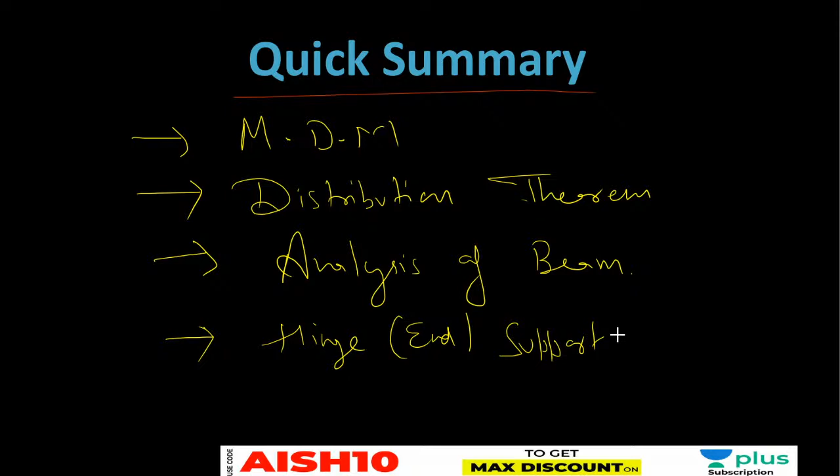Okay, whenever my far end is hinge, last support is hinge, so you can directly consider that support as a hinge support. Okay, तो उससे क्या होता है आपका, आपने कल देखा, टाइम बचता है आपका. इज इट क्लियर? ठीक है. So hinge and hinge, we have analyzed that with two ways. One, considering it fixed, considering it hinge. Okay, so both the approaches we have seen yesterday. I hope समझ में आया होगा आपको. कोई डाउट हो तो पूछ लीजिएगा.

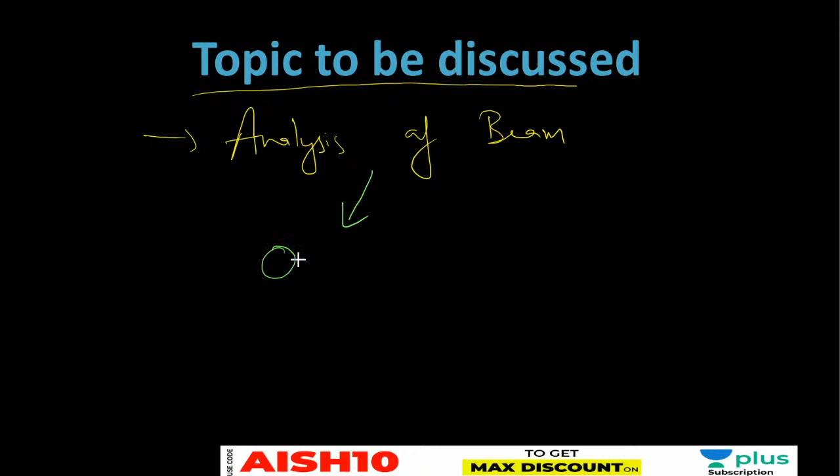ठीक है, चलो. So today we have to see analysis of beam only. Analysis of beam, और आज बीम ही एनालाइज करेंगे. और इसमें बेसिकली I am going to take care of overhang portion and support settlement. ओके, ये दोनों टारगेट है मेरे आज के, है ना. सपोर्ट सेटलमेंट की बात करेंगे और ओवरहैंग पोर्शन की बात करेंगे. ठीक है, चलिए स्टार्ट करते हैं.

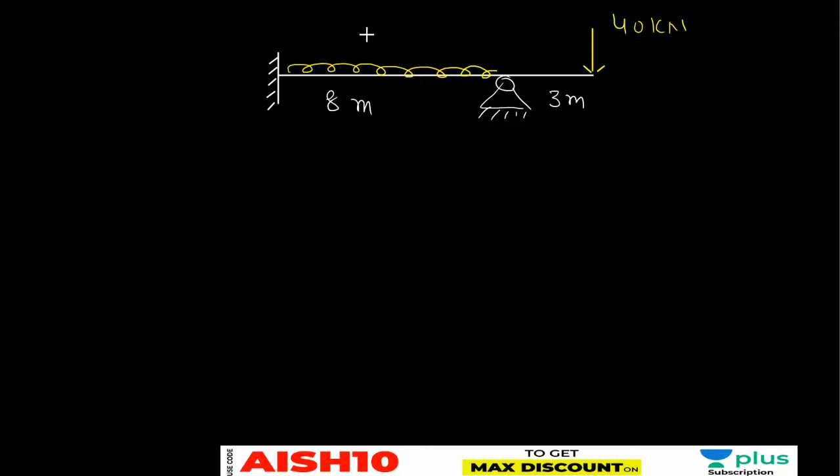Okay. EI is constant, EI is constant, and give me the end moments or draw the bending moment diagram. Okay, EI is constant here. And give me the end moment. I'm giving you 2 minutes time. First of all, give me the distribution factor, fixed end moment. Okay, then we will be proceeding.

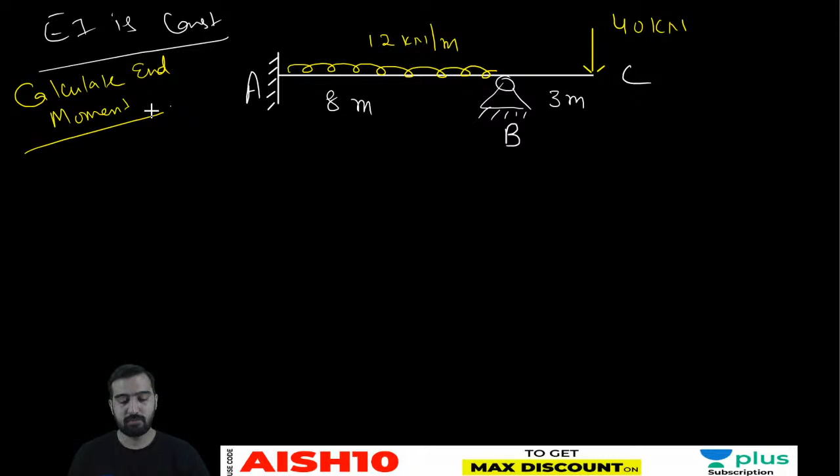Go ahead. So what is fixed end moment?

Okay Piyush, correct.

Is it clear? So MFBC, or you can say final moment BC, is same, because there are no corrections for theta, delta. So MFBC is nothing but MBC. Is it clear?

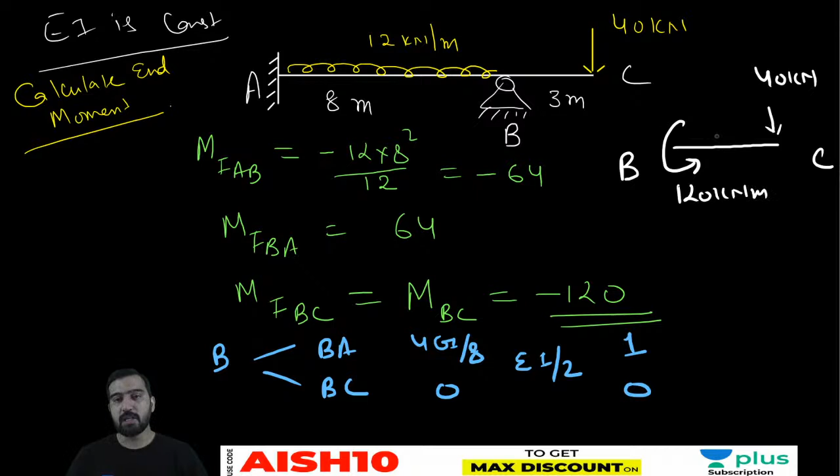So if we have to maintain it in moment equilibrium, then I have to provide 120 kilonewton meter in anti-clockwise direction. Then only this segment will remain in equilibrium. Is it okay Astha? Yes, it is minus 120.

Yes, the distribution factor is also known to you guys. Okay, so now what is next?

Okay, so now see joint, member, and distribution factor. So here joints are A, B, and C. Members are AB, BA, BC, and CB. Distribution factor is 1, 0.

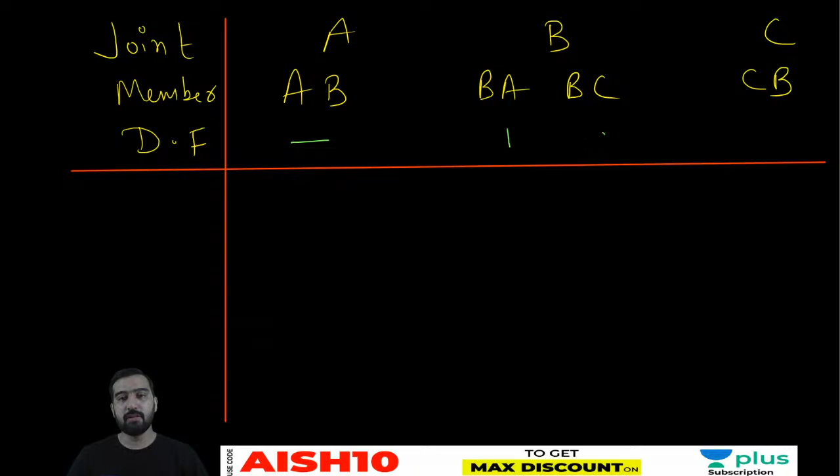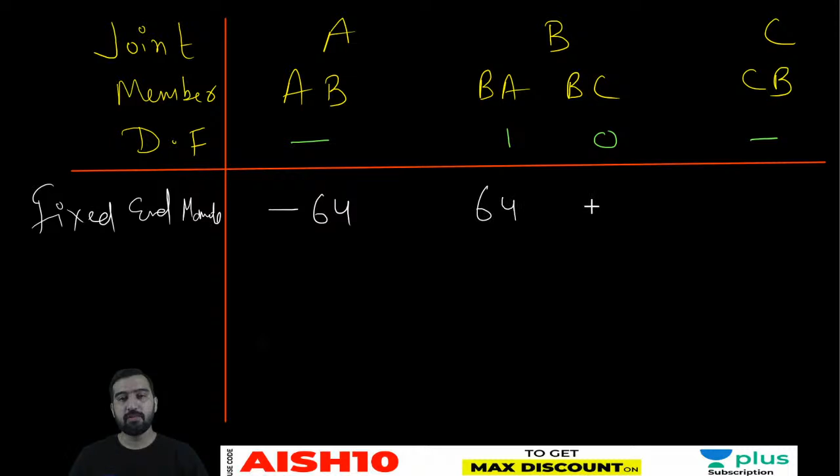Okay, it's like this. And the very first step is to write the fixed end moments. So fixed end moments, they are minus 64, plus 64, minus 120, 0.

After that we have to do the distribution here. So on distributing it, distribution will be there at this B support. So here it is clockwise and it is anti-clockwise. It is 120 and it is 64.

So how much is the unbalancing? 56, I guess. So that 56 anti-clockwise. So you have to provide plus 56 from your own side, and that plus 56 is to be applied.

Then that is to be distributed in the ratio of 1:0. Means the entire 56 will come here, and out of 56, 0 will come here because the distribution factor for overhang portion BC is equal to 0.

And my dear friend, after that we have to look into the carryover factors. So carryover factors, you can see that they are going to be 28, 0.

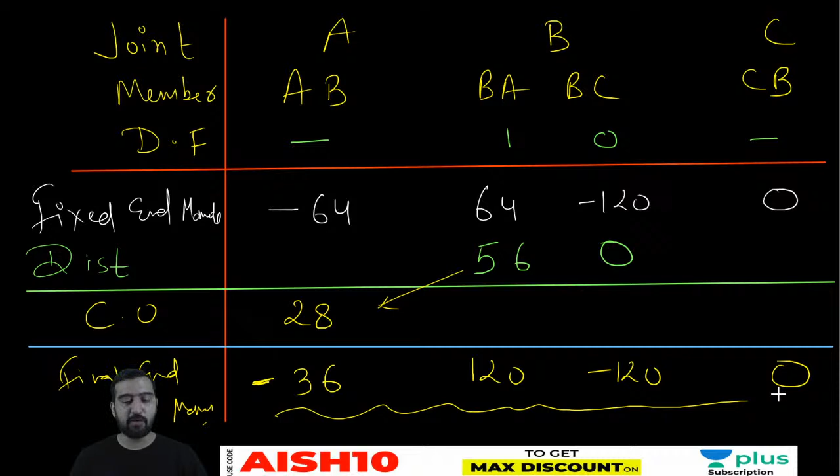Please check it, my dear friends. Yes, Harshit is also getting the same. Okay, so Harshit is also getting the same.

Is it clear to everyone? Please let me know if you guys are having any doubt till here. Is it clear to all my dear friends?

Okay, so I'm not drawing the bending moment diagram exactly. I'm just giving you the tentative shape, not going exact. So this is my base. Okay, so it is A, it is B, it is C.

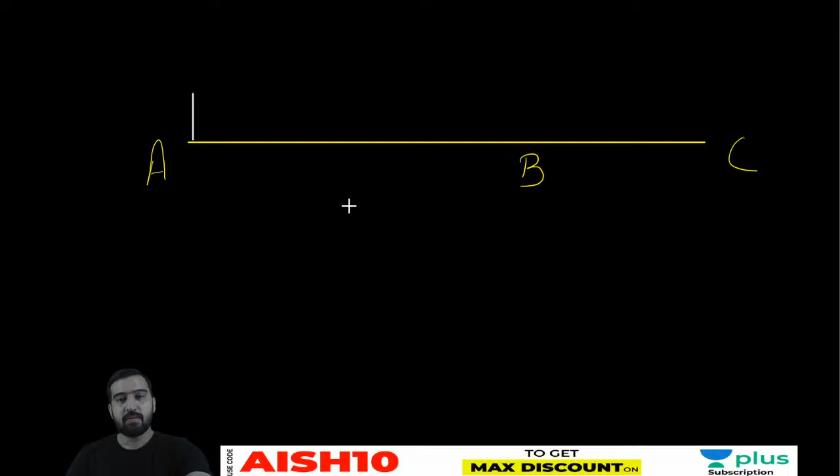So if I am drawing the bending moment here, it is anti-clockwise, negative is on the left side, on top, and it is 120, coming down below. I am only giving you the tentative shape of BMD, not solving exactly.

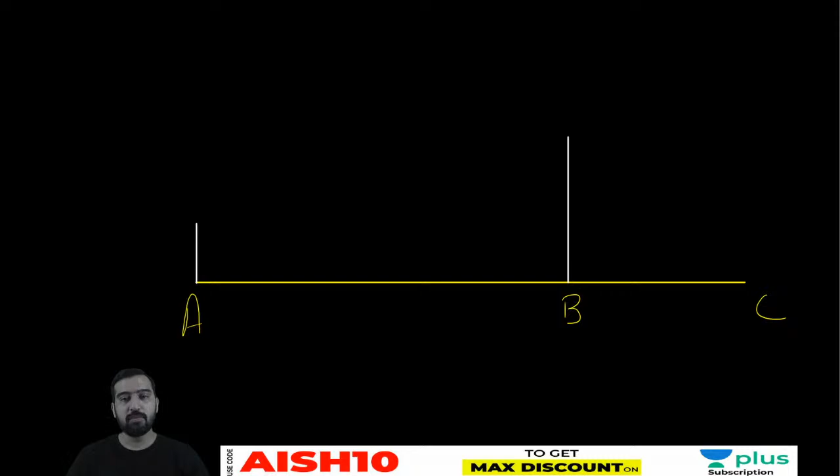Okay, this becomes -36, anti-clockwise so it will come on top as 120. So it is 36, 120. Okay, so the diagram here would be linear.

And this is negative. Okay, now if you are drawing the UDL portion on simply supported beam, WL square by 8, so 12 into 8, 64 by 8... 12, 8, 96. It will go parabolically, and the maximum value here would be...

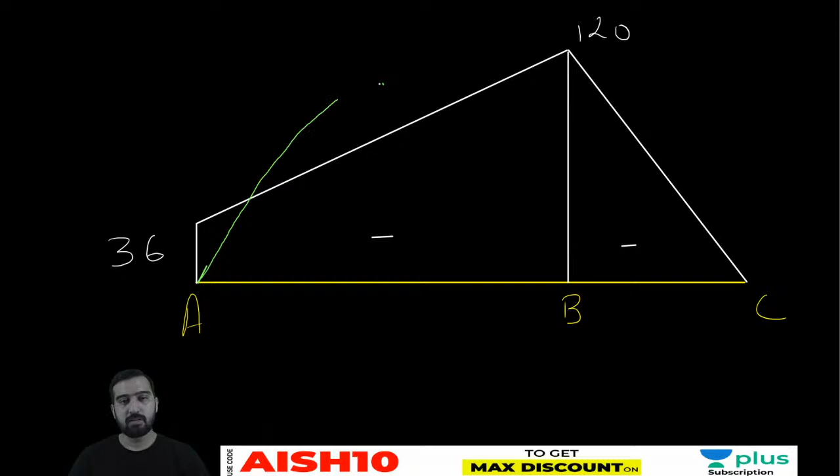negative, positive, negative, negative. So total how many points of contraflexure are there? The total number of contraflexure points are 1 and 2. Okay, so you can say those two points of contraflexure would be somewhere here and here.

So this is in hogging, this is in sagging. From here to here again, the entire thing is hogging. If you want to draw the deflected pattern, then it would be something like this.

Then sagging, then again hogging.

Something like this will come, okay? Is it clear to all my dear friends? And also the slope here, you will be able to find the correct orientation, whether it is anti-clockwise or clockwise. Suppose if I want to know the slope here, so what is slope here?

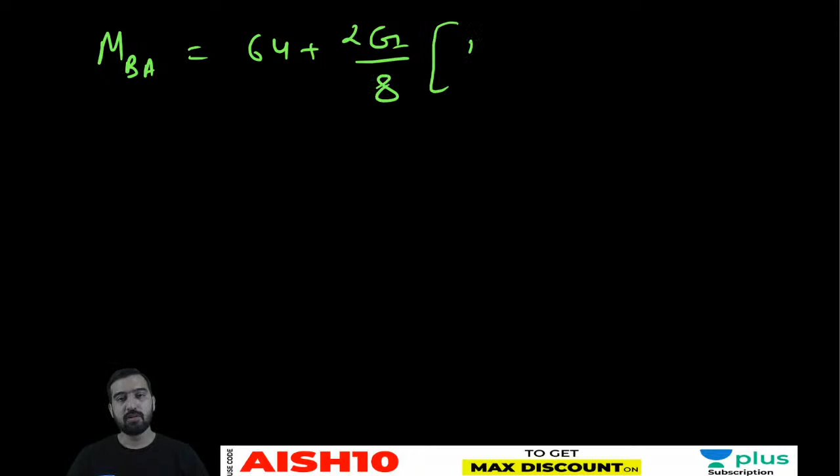That's all. So MBA is 120 minus 64 into 4 by EI by 2.

So it is positive, means theta B is coming out to be positive. It means slope here would be clockwise. So there is some error. It is not the correct shape then.

So now the correct shape would be like this. Yes, it is like this. Okay, this is the deflected pattern of ABC. Is it clear to all my dear friends?

Is it clear to all? Tell me. Okay. Any doubt? Okay, let's do the next one. Next question is...

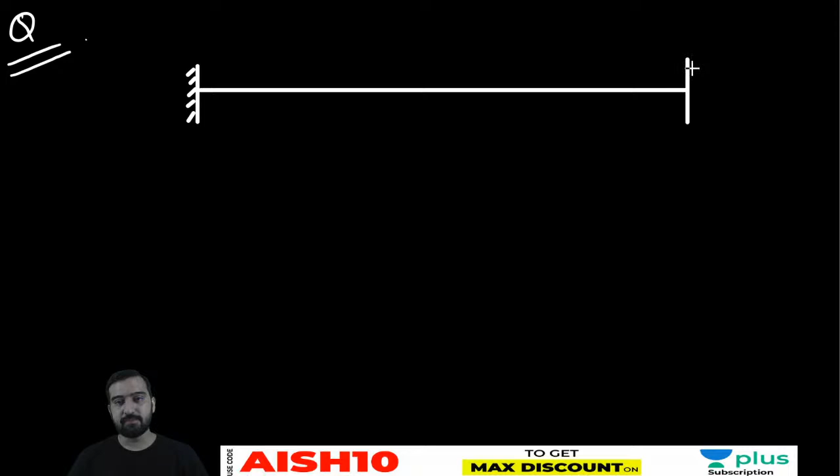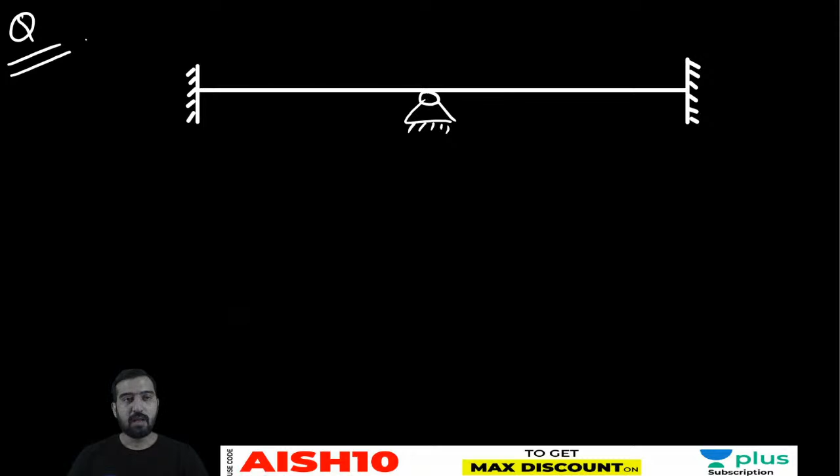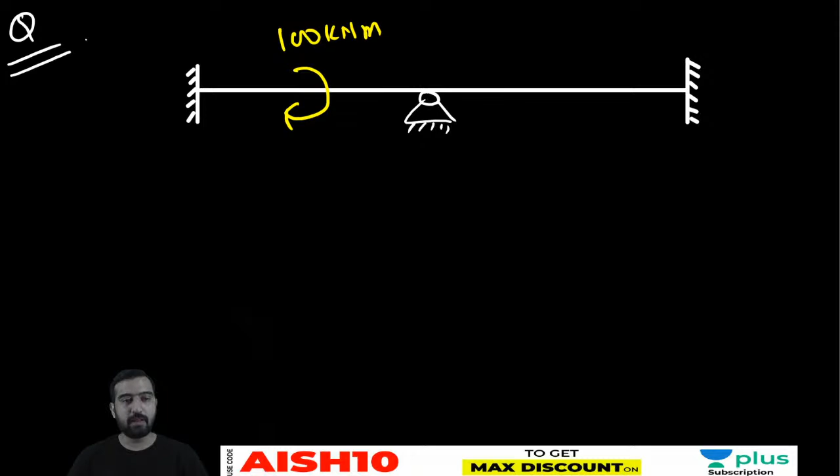I think a moment of 100 kilonewton meter was there, and a point load was acting here of 100 kilonewton.

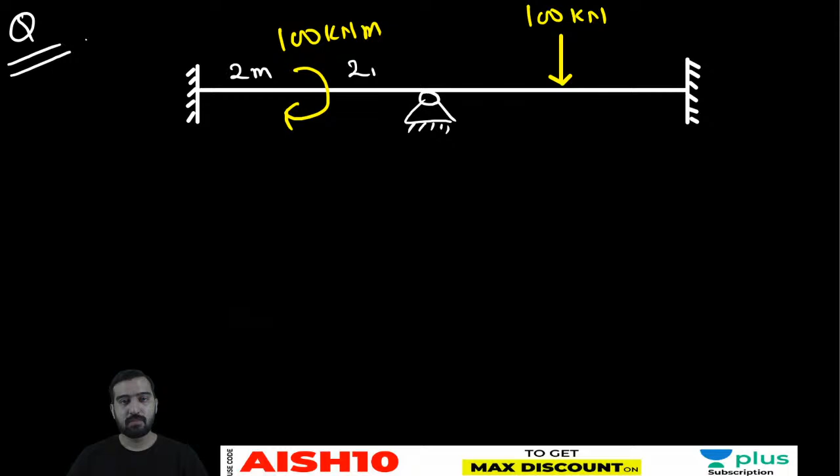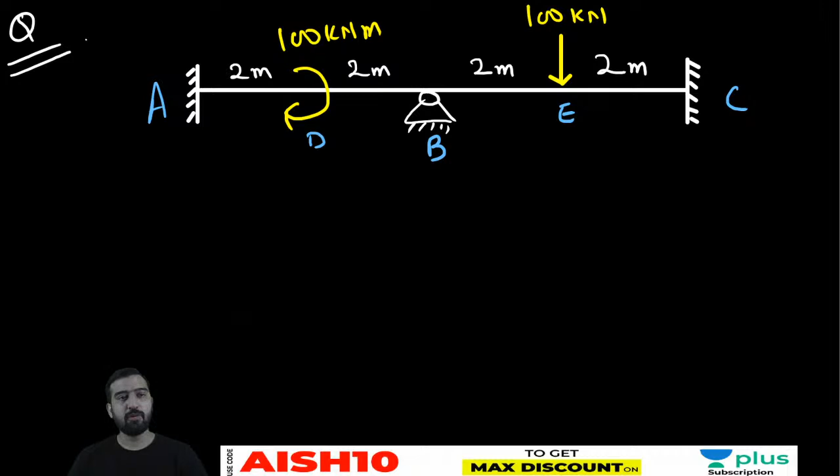Okay, and what else was the data? Support B was settling, I think. Yes, support B was settling. Okay, 1mm, very good.

And what was the EI value, Ayush? What was the EI value? EI was 48,000. Okay. And delta B was? Thanks, Ayush.

Slope deflection was important because in order to see the direction of delta, when minus and when plus will come.

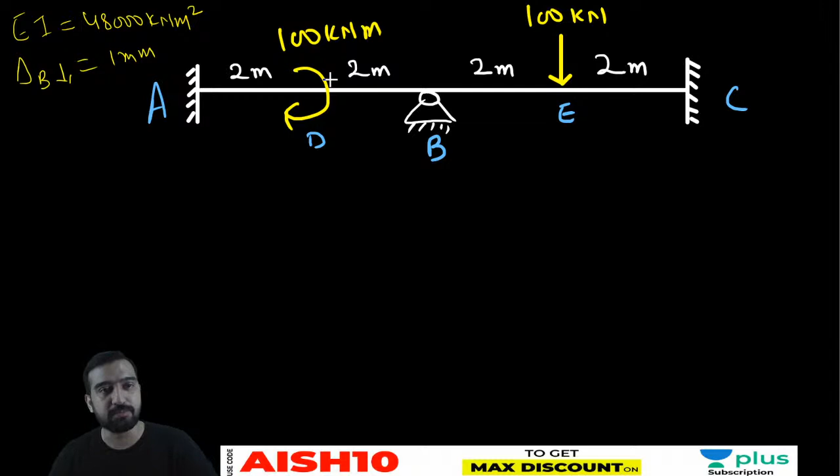Hint is this much, that in moment distribution method, if we know the settlement, if we know the EI value, then calculate the end moment due to delta and merge them up with the fixed end moment. Is it clear?

So what you can do, just a hint to all of you: calculate FEM due to load plus FEM due to delta. So for all four ends AB, BA, BC, CB, calculate FEM due to load as well as FEM due to delta and add them up, and whatever value of FEM you are getting, simply put that into this table in place of this. This is only due to load because settlement was not there. Simply put it here and solve it. Okay.

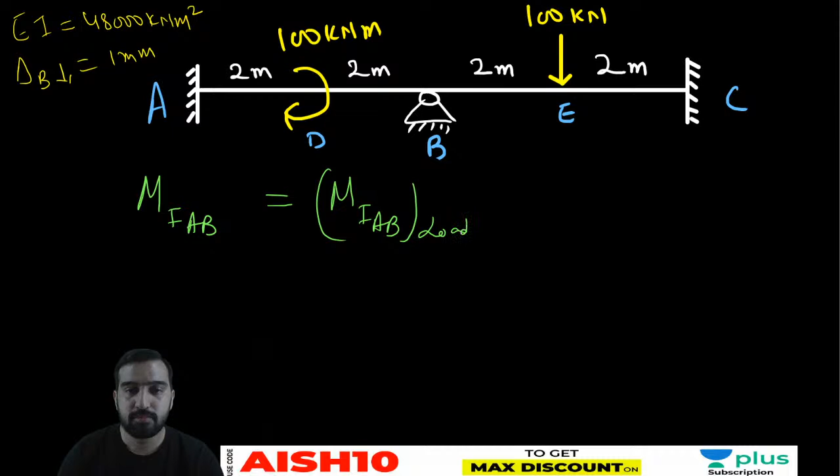MAB, MFAB is equal to MFAB due to load plus MFAB due to delta. Okay. Yes, Ayush is right.

What is MFAB? See, MFAB due to load, this is 100 acting at the center, so it is 25. I have seen, okay, it is 25 plus MFAB. What is MFAB here?

So this support B is going down, my dear friends. So if delta is going down, AB is moving clockwise, then the preventing effect will be there. So due to that preventing effect, moment generated at A and B will be of same nature, will be in anti-clockwise direction, and its magnitude is going to be equal to anti-clockwise 6EI delta upon L square.

And substitute the value of EI, delta and L. Let's calculate this once. So 6EI delta upon L square is equal to 6 into 48,000 into delta upon L square, means 4 square. This magnitude will be same for these two supports and for these two supports, because length of this span is same, EI is same, delta is same.

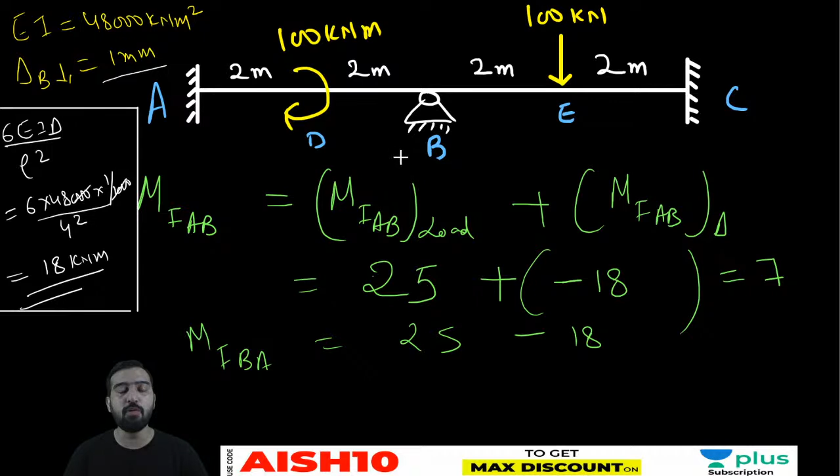And similarly, if I am writing here MFBA, then it is 25 minus 18. Because MFBA is also anti-clockwise due to delta, and MFBA also plus 25, M0 by 4 due to couple. So it is going to be 7.

Now the funny, interesting part will be in the BC span. So if I am talking about MFBC, then due to 100, the moment generated here is PL by 8. So it is minus 50.

And when delta will go down, the tendency of BC is to move in the anti-clockwise direction, my dear friends. Now the retaliating moment, the preventing moment, will be generated in the clockwise direction. So it will be equal to...

Minus 50 plus 18, so it would be minus 32. And MFCB would be equal to plus 50 plus 18.

Please let me know, my dear friends, if you guys are having any problem. The question was up to here only. After that, in a single step, you are getting the answer. And yes, what about the distribution factor?

So the distribution factor for this beam is going to be the same, 0.5 and 0.5. Far end is fixed, 4EI by L. L is same, EI is constant. Far end is fixed, 4EI by L. L is same, EI is constant. So distribution factor would be 0.5 and 0.5. Please let me know, my dear friends, if you have any doubt so far.

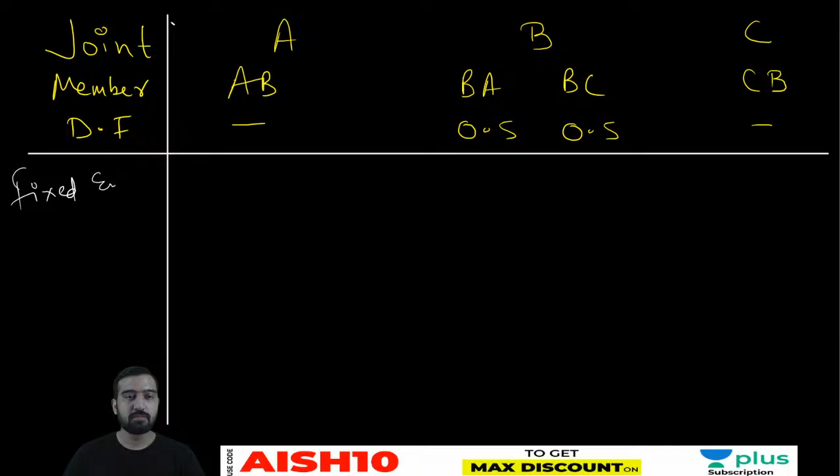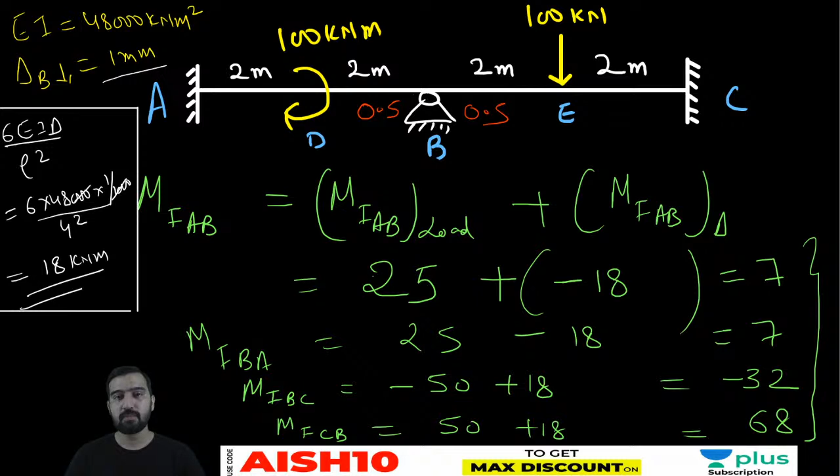So now the fixed end moment. Okay Ayush, good, well done. So the final fixed end moments are 7, 7, minus 32, plus 68.

Okay, so in the moment distribution method, if the settlement value is given to you, EI value is given to you, then directly compute the value of fixed end moment due to delta and simply get them added into your fixed end moment due to load. Is it clear to all my dear friends?

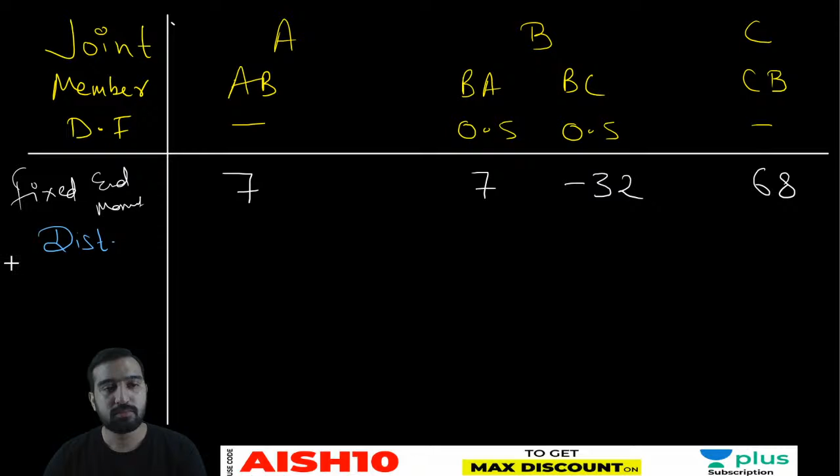So now the distribution here is minus 25. It is minus 25, and minus 25 is to be balanced like this. In order to compensate minus 25, I have to apply plus 25 clockwise, and clockwise 25 will be distributed into two parts. What is that?

12.5 and 12.5. Okay, and the carryover for this would be 6.25, and here also far end is fixed.

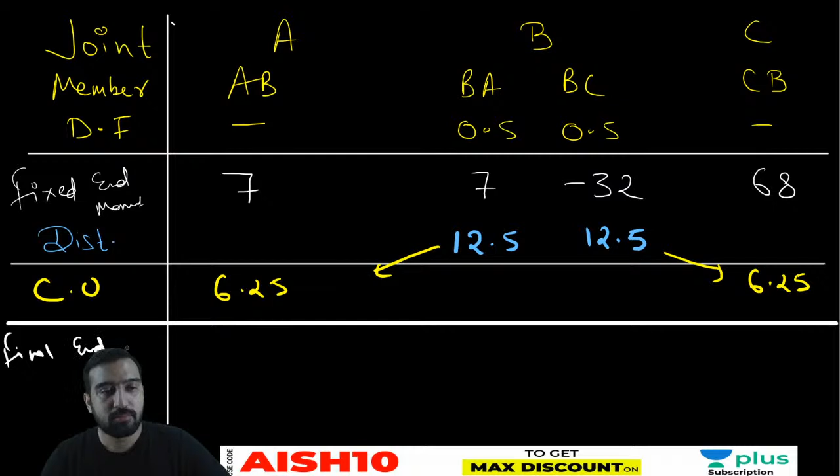So you can say the fixed end moment, the final end moment, is 13.25, 19.5, minus 19.5, and 74.25. Is it clear to all my dear friends?

Tell me, is it clear to all? Is all these things clear, that why carryover is there? Why from here to here it is not there?

Where balancing is there, from there the carryover factor would be there. It is going half. It is going half because supports were fixed. If it would have been hinge, then it is difficult for carryover to move.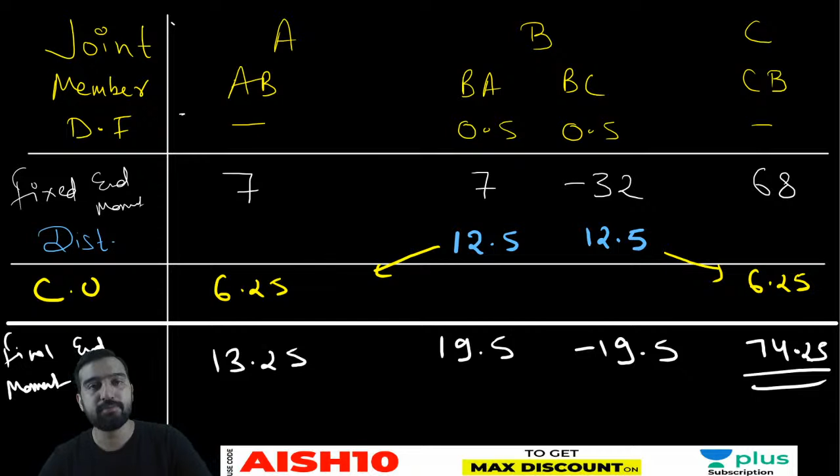Okay. So now one more question.

This also I have asked you several times in a test or in some other sessions. This is from R.C. Hibbeler.

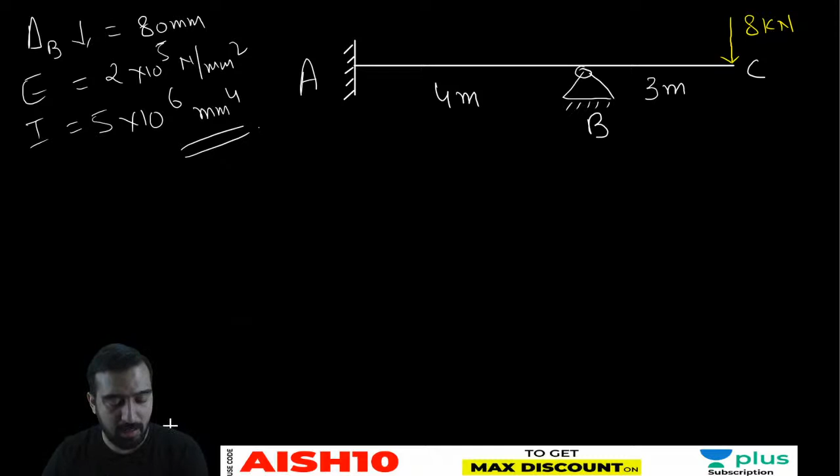Okay, so you have to calculate the end moments. You have to calculate the end moments.

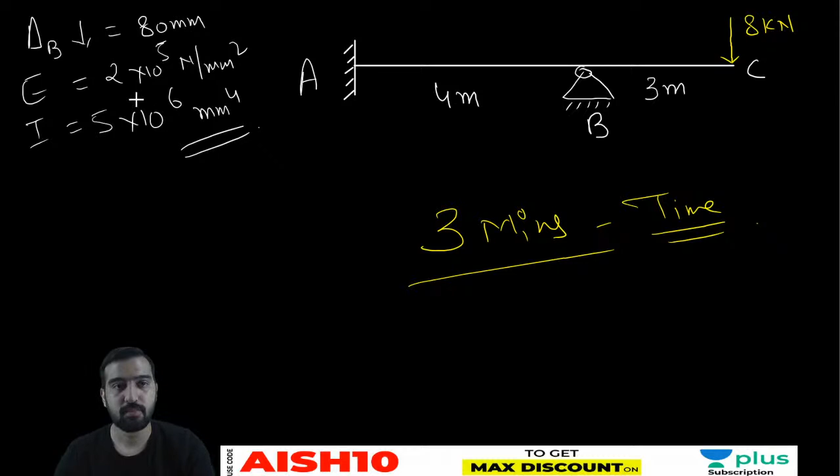Distribution factor toh sab nikaal loge. Joint B, 2 members are there, BA and BC. It is 4EI by 4, zero. Sum is EI. Distribution factor is 1, 0. So distribution factor is, yes, Ayush is right. Very good, Ayush.

Now let's come to the fixed end moments. Support B is sinking by 80 mm. Arre Harshit bhai kya kar diye, CB pe toh 0 aayega. Okay.

So what is MAB? MFAB. Due to load 0 and support B sinking by 80 mm, AB member tries to go in the clockwise direction, so the preventing moment has to come in the anti-clockwise direction. So it is minus 6 EI delta upon L square.

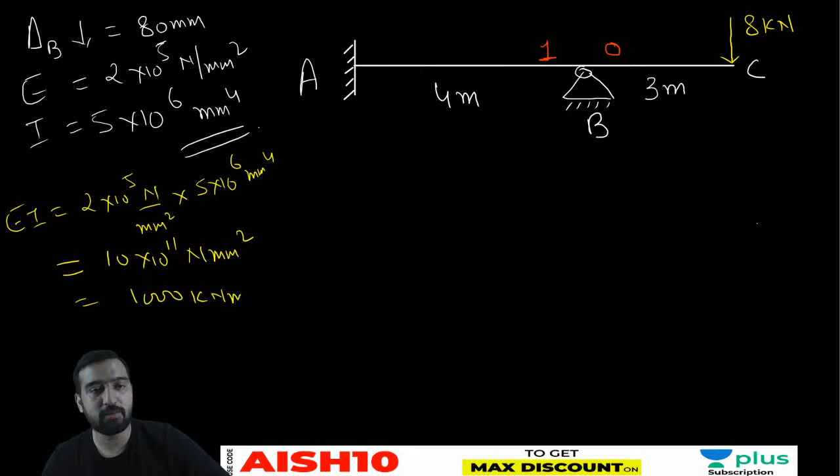So 0 minus 6 into EI. Isko EI ko separately calculate kar lijiye. EI is 2 into 10 raised to the power 5 Newton per mm square into 5 into 10 raised to the power 6 mm4. So it is coming out to be 10 into 10 raised to the power 11 Newton mm square. So kilo Newton 1000 se divide kar do, mm square 10 raised to the power 6, so it is 1000 kilo Newton meter square. Okay, now MFAB

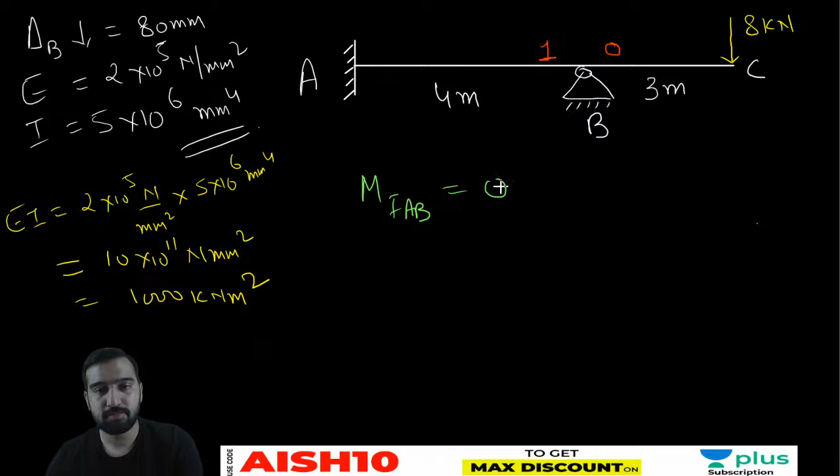is 0 minus 6 EI delta upon L square. Similarly, MFBA is 0, again preventing action anti-clockwise. MFBC how much? Clear hai? Is it clear to all my dear friends?

Tell me. So now substitute the value in the table. Joint, member.

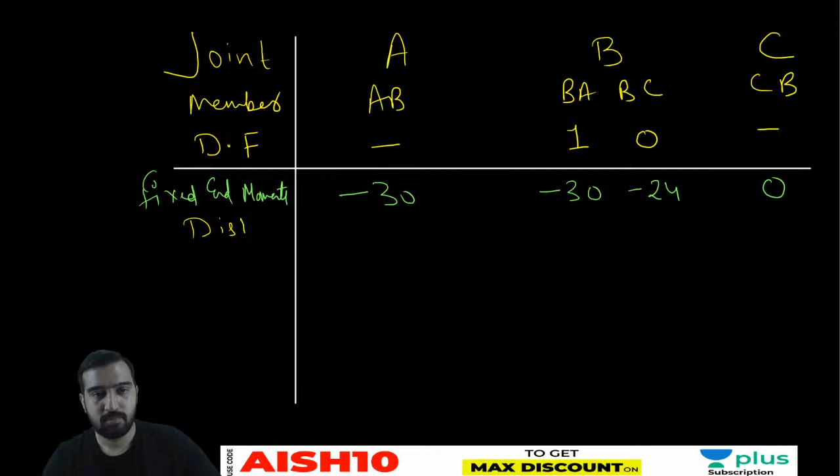So the fixed end moments: minus 30, sorry not minus, yes minus 30, minus 30, minus 24, 0, and distribution minus 54. In order to compensate minus 54, you have to apply plus 54, divided into the ratio of 1 is to 0. So 54 will come here and 0 will come here. Is it okay to all?

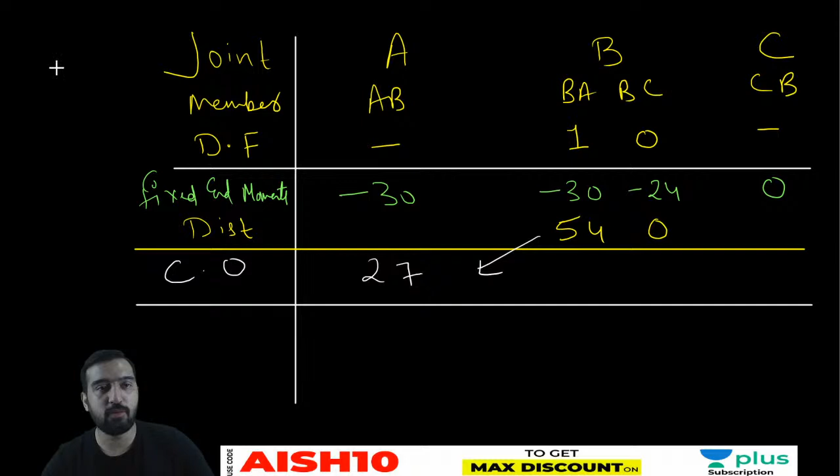Now the carryover, my dear friends. So carryover moment, 27 only, and the final moment: minus 3, 24, minus 24 and 0. So these are the final end moments.

Is it clear to all my dear friends? You can see here only one funda is there. Whenever delta values are known to you, try to calculate the moment due to load and the moment due to delta separately and merge them up. Merge them up. Okay?

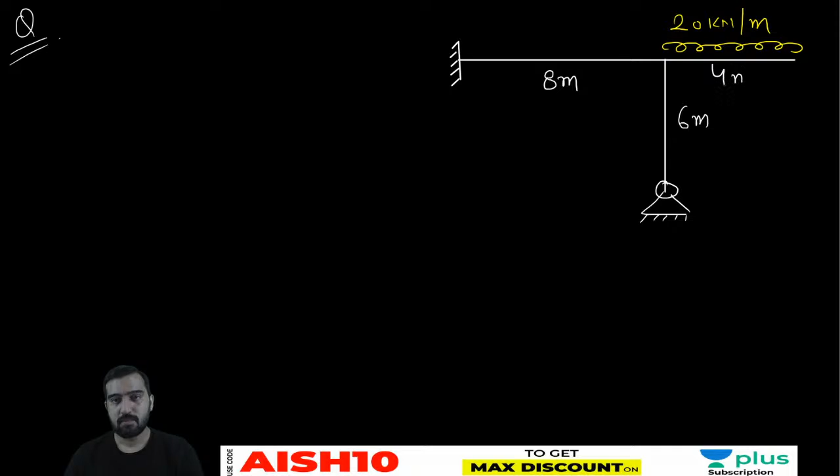So EI is constant for the entire members, and you have to calculate the moments. Tell me the value of moment at A. Tell me the value of moment at A.

No, Astha. How come the moment at A will be 0? Moment at C will be equal to 0. Astha, moment at C will be equal to 0. But I have asked the value of moment at A.

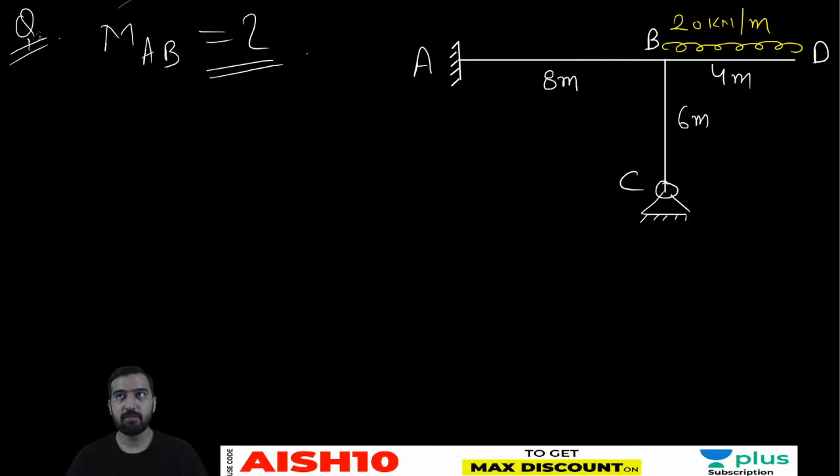Toh theek hai, as Asta is saying that sir, fixed moment at A is equal to 0. Similarly, fixed moment at BA is also equal to 0. Fixed moment at BC is equal to 0, and fixed moment for CB is also equal to 0. And fixed moment for BD, or final end moment, it is minus 20 into 4 into 4 by 2. So it is equal to minus 160. Any doubts so far?

Minus 160 is the fixed moment at BD. Okay. So 0, 0, 0, 0, minus 160, 0. Okay, so I am removing this value.

No Piyush, at A you are telling na? At A it is not correct. Now let's see.

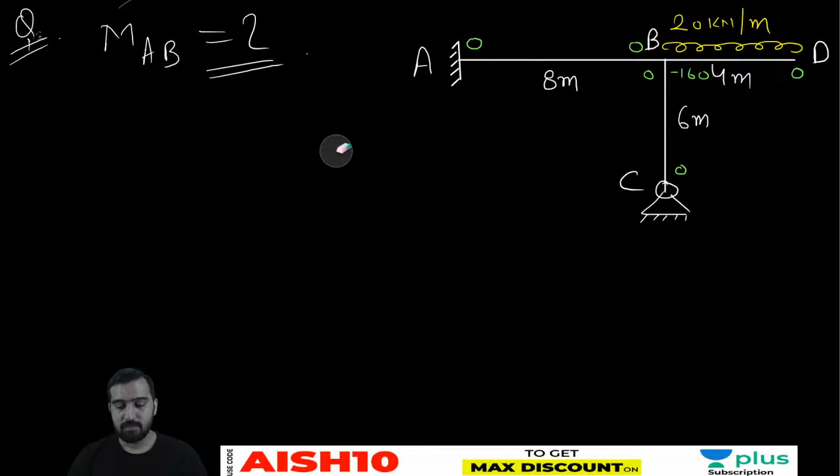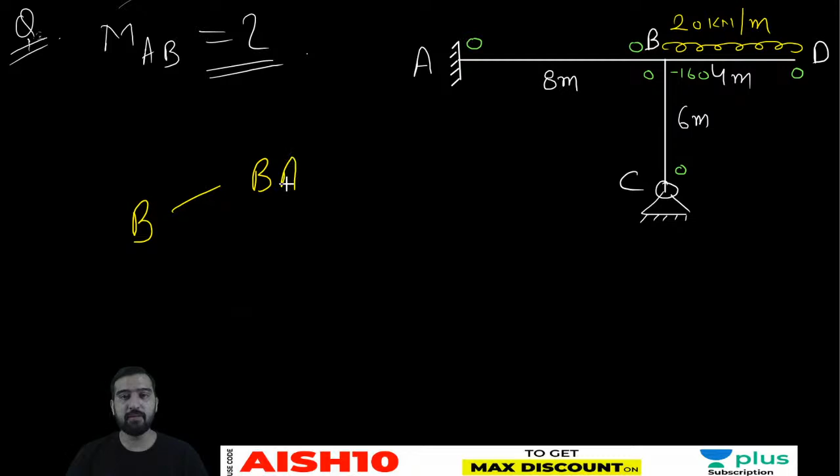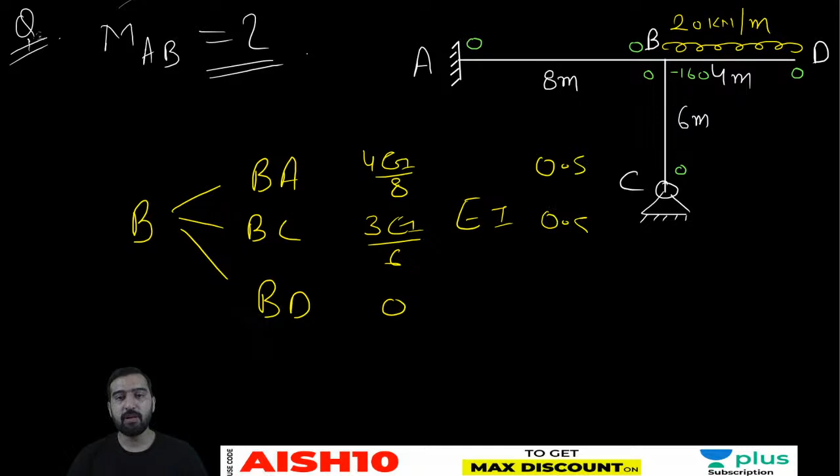Ayush has given the answer. Okay, Ayush seems right. Now the distribution factor. So here there is joint B, and there are this time three members: BA, BC and BD. So stiffness is 4EI by 8. Far end is hinged, so 3EI by 6, sorry 0. So it is EI by 2, EI by 2. The sum is EI. And distribution factor is 0.5, 0.5 and 0.

So this is the table for the calculation of distribution factor. I can say here that the distribution factor for this member would be 0.5. Here as well it is 0.5, and it is having 0 distribution factor. Overhang point kahin bhi mile, blindly you can go for 0 distribution factor. But don't try to eliminate it from this table. At initial stage, keep this value with you.

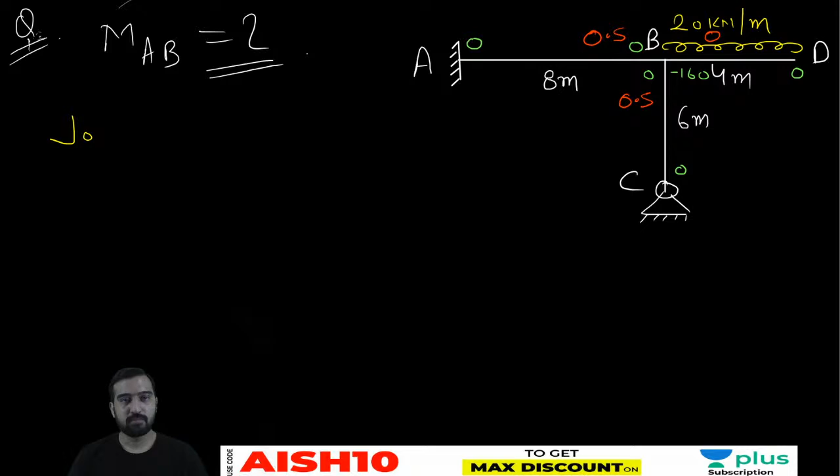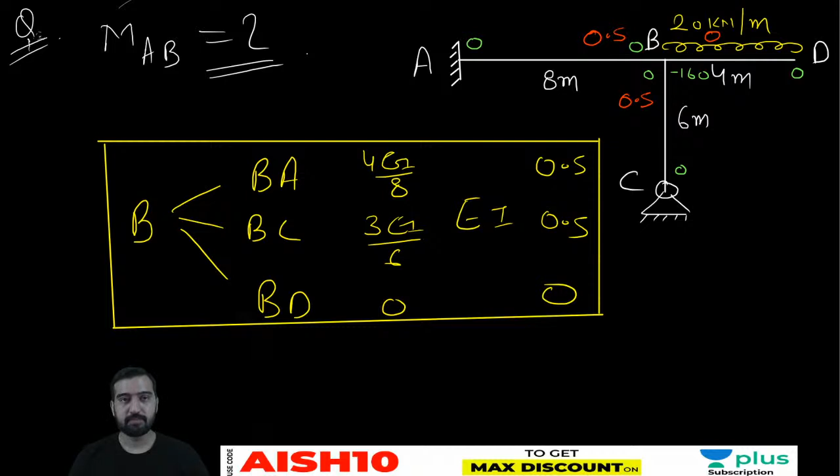Agla page iska leta hoon. Joint, members and distribution factor. Joint is A, B, C, D. AB, BA, BC and BD, and CB and DB. Dekho yahi ho raha hai. BA BC BD aur D pe DB ek hi hai na? Okay Piyush, okay good, okay chaliye. So distribution factor here would be 0.5, 0.5 and 0.

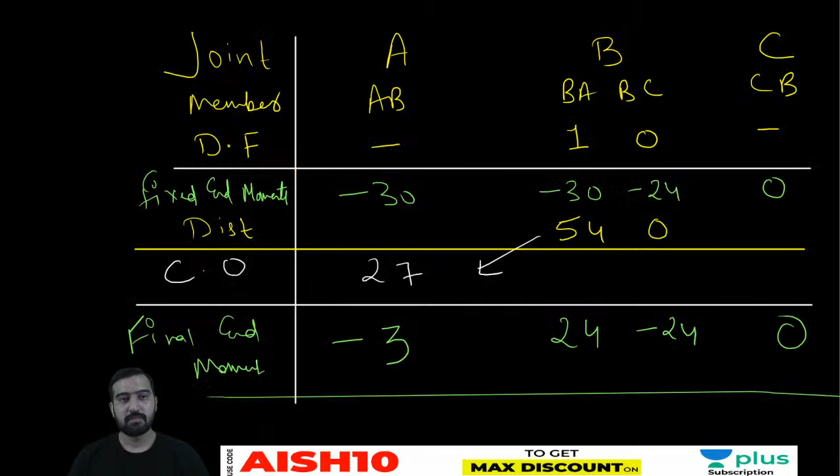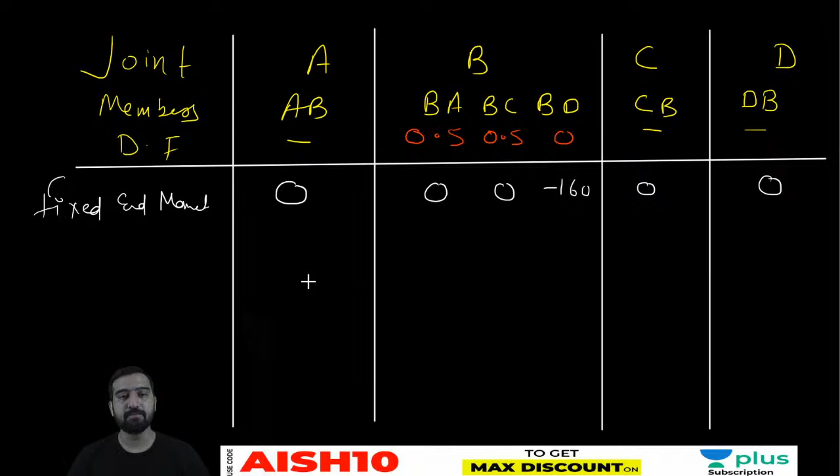Okay, so unbalancing is there only at joint B. So now on distributing it,

Okay, so it is minus 160. So to compensate minus 160, my dear friends, you have to apply plus 160 from your end. So plus 160 if you are applying from your own end, that's clockwise 160. So that is distributed into three parts virtually, but originally it is getting distributed only into two members, BA and BC. Since the distribution factor for BD is equal to 0, so no component of moment is going to occur in BD. So this plus 160 has to be divided into two equal parts, 80 and 80.

It is 80 and 80. Nothing here, 0 here.

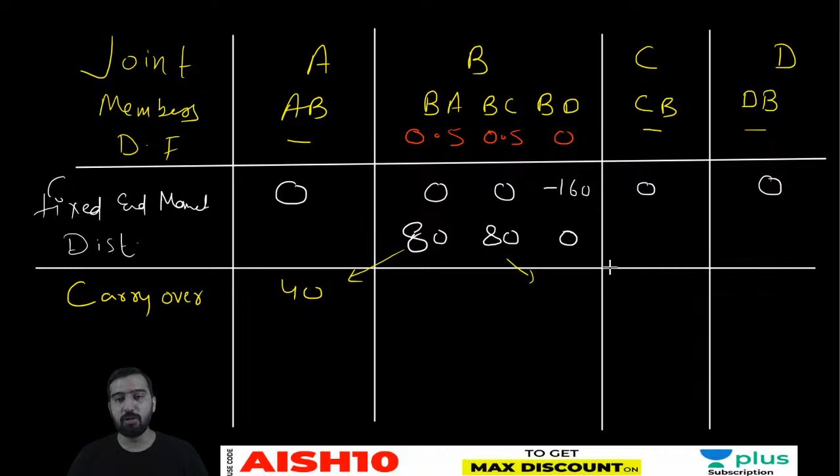Now let's come to the carryover. So carryover would be: B to A, far end is fixed, it will get transferred. B to C, no carryover because far end is hinged. Okay, so that's all, only these things.

So now the final end moments. Final end moments: 40, 80, 80, minus 160, 0 and 0. Is it clear to all my dear friends? So these are the values of final end moments.

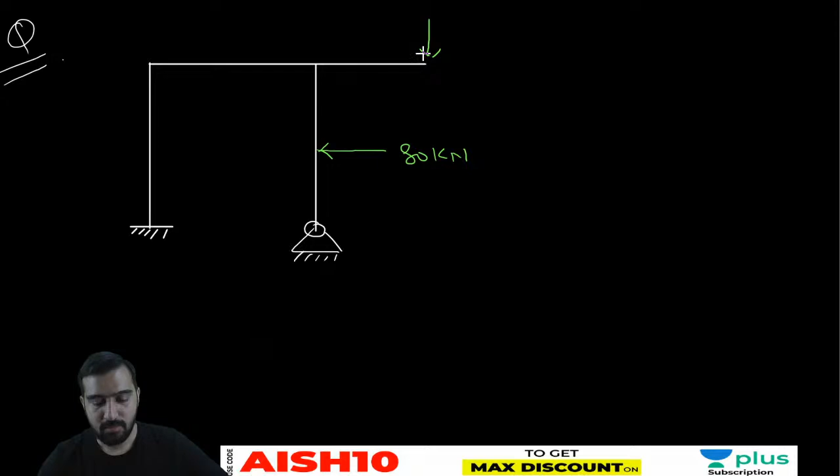Thank you Piyush, thank you. You should thank the Unacademy faculty, but you should also thank Unacademy itself, because actually we are getting paid for all these services. So it is actually Unacademy which is bearing all such things for you guys. We do get paid, but eventually it is Unacademy only which is bearing all these things for you guys.

So thanks a lot for the appreciation, Piyush.

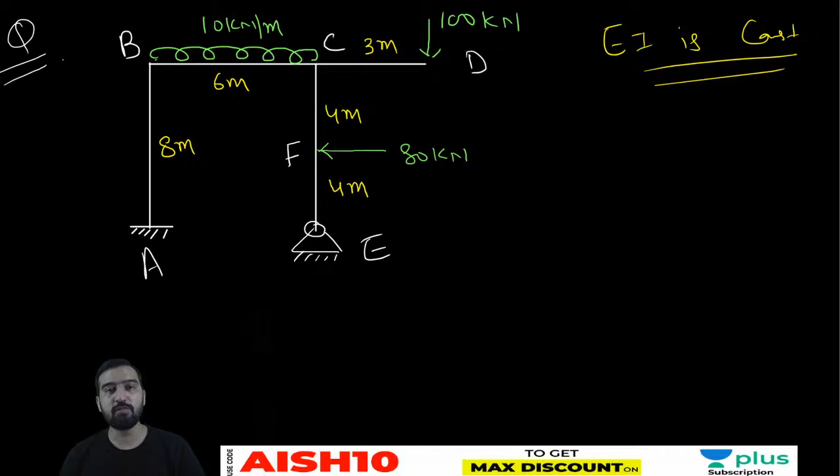Is it clear to all my dear friends? So 2 assignments are there for you guys, this one and this one. Let's see whether you will be able to crack it or not.